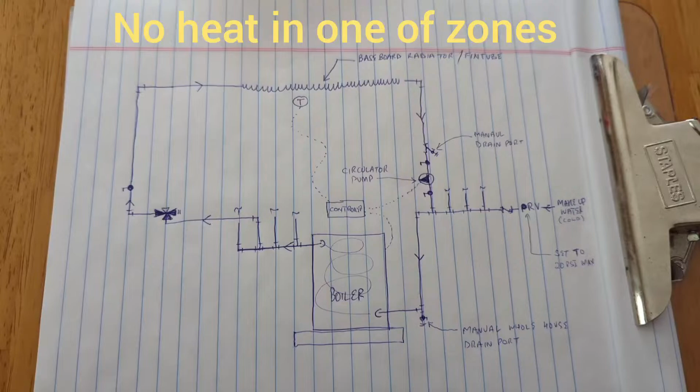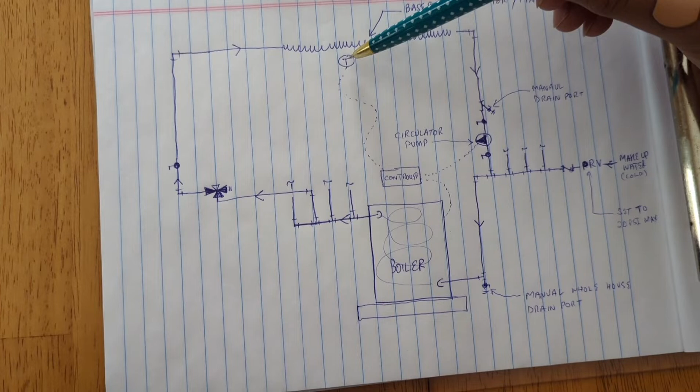So the thermostat in the space is calling for heat, but there is no heat. There's no water flow through the baseboard radiators in the space. And so even though this is calling for heat, set to 68, 70 degrees, actual temperature inside is 55 degrees.

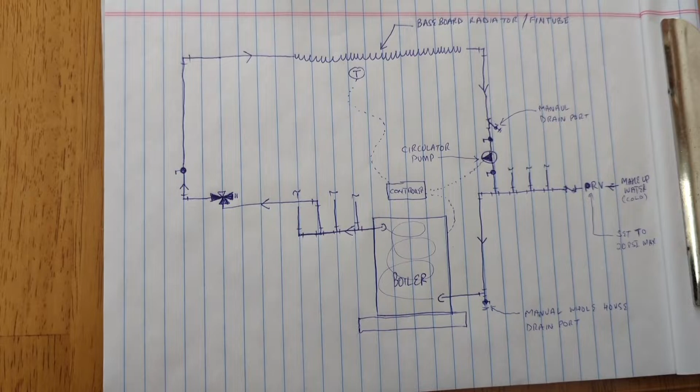And to go to the boiler room, first you look at the controller and see if the light is on for that specific zone to confirm if it is calling for heat, and it is calling for heat. So you know that there's no problem between the thermostat and the controller. Then you hear the humming of the pump, which indicates that the pump is running or trying to run.

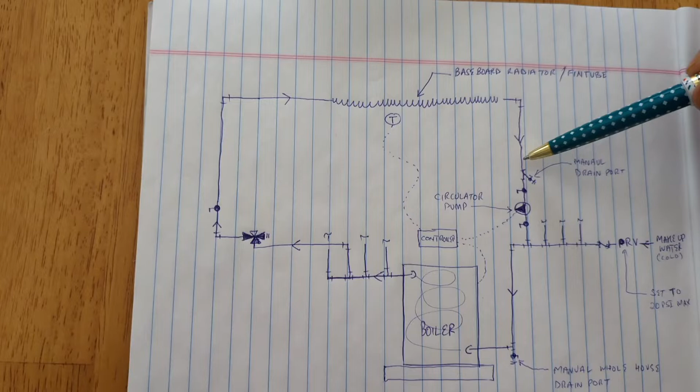And you look at the pump and you touch it, it's going to be very warm. When you touch this pipe, the pipe is not hot like the way it's supposed to be. Okay? That means there is no flow through here.

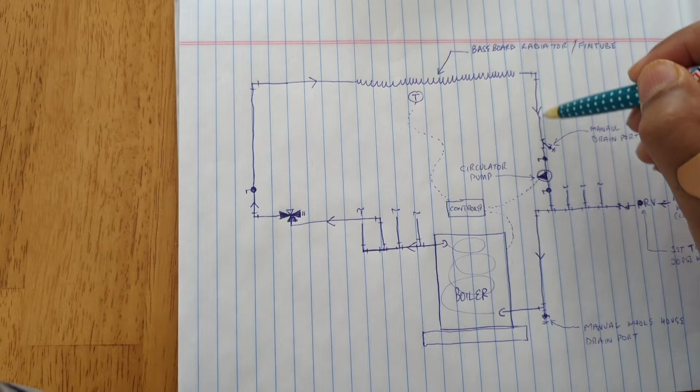The way it's supposed to work is this pump is supposed to pump. The thermostat tells the controller I need heat. Controller says pump come on. Pump starts to turn. The flow of the water is pumping through the boiler. So this is how water moves.

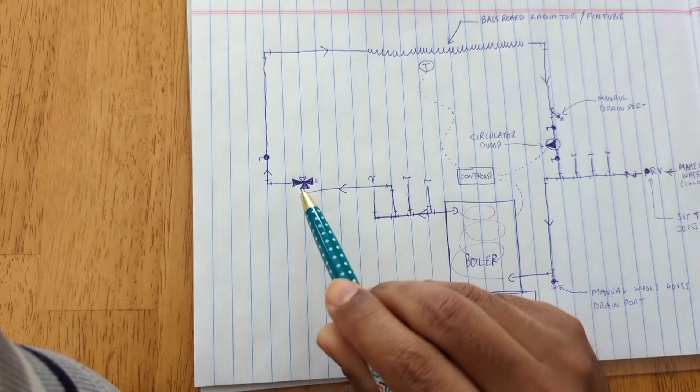So from the pump, water moves, comes here, goes here, comes here, goes inside the boiler, goes through the heat exchanger inside the boiler, comes back out, goes to the specific zone flow valve, which is essentially a backflow preventer for the hydronic systems, so that the water flow is only in this direction and never in the back direction.

And this is usually used when you have multiple zones. So the water is coming through, like I said, move through here, goes through here, goes all the way around.

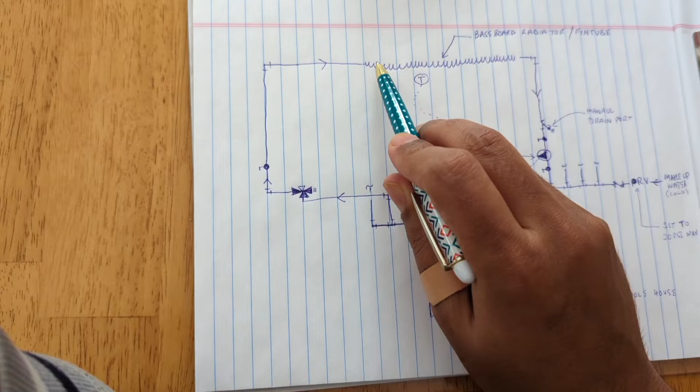Goes through the radiators. So entering it, water is 180 degrees. By the time it leaves, it's probably at 140, and it's coming back down. And then as long as this pump is moving, the water is doing the circulation through that particular loop. There are other zones that we're not going to discuss, but they do the same, and they do it independently.

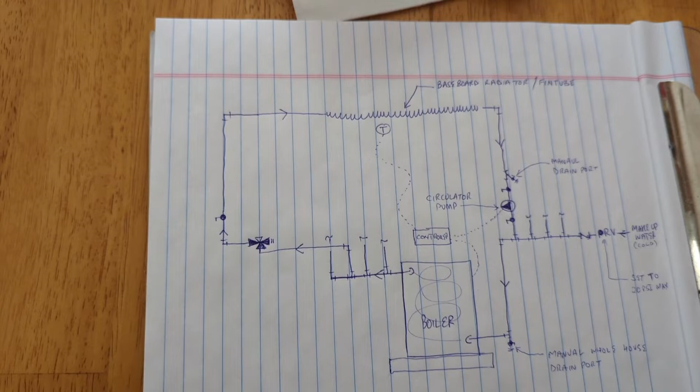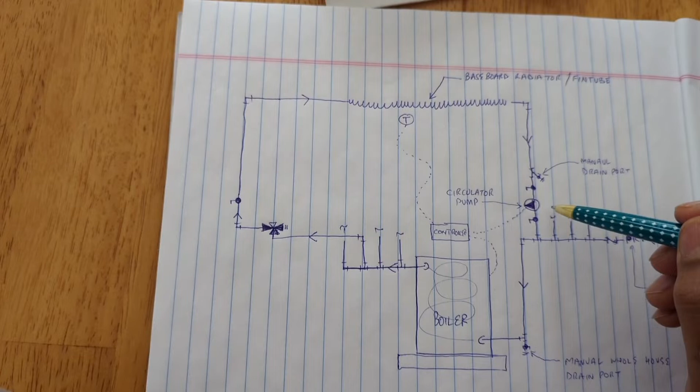So test number one is to see if this motor works. So one of the ways to do that is to turn off the system, remove the motor from the housing, and see if the impeller moves freely. And also you can do the test, not recommended, but that's what I did, is turn the thermostat back on and see if the motor spins, and it spun just fine. So that was the test.

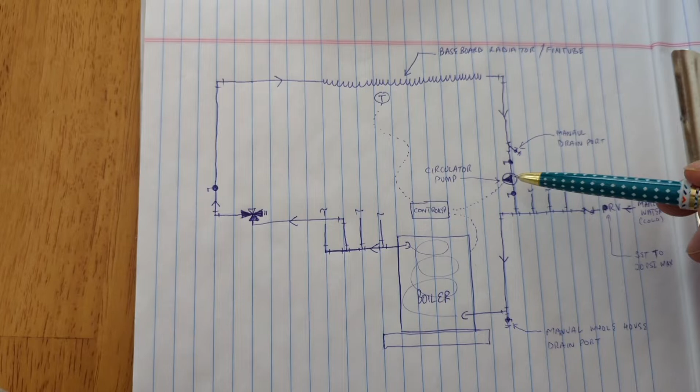Is this circulator bad? No, it was not bad. One thing that I would say is it's possible that this pump may be not as strong as it used to be, but I have a suspicion that that's not really the case. Banking on that based on what my diagnostic was.

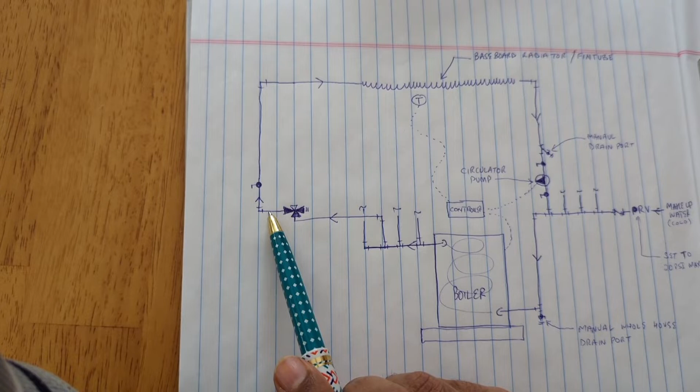So this pump is working. It is doing what it's supposed to do, but why is water not moving through? Because every other zone, if you touch these pipes beyond this backflow valve, it's called flocheck, Flocheck, made by Taco, flocheck valve. This side should be very hot, but in our case, not really. It's not hot compared to the other zones.

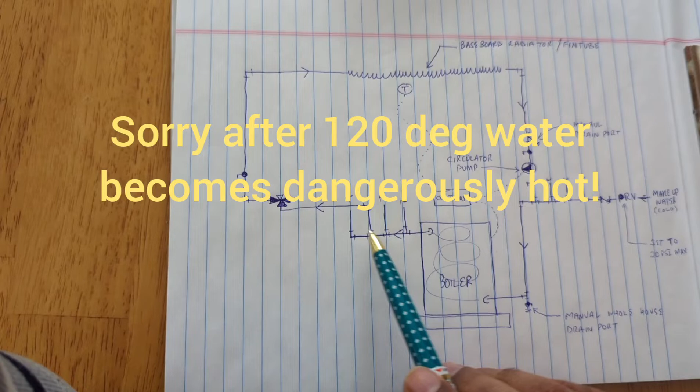Because the water is moving, it's not touchable. Because 180 degrees is really hot. 120 is your limit. After that, you can burn your hands. So the copper pipes and metal pipes are really, really hot. And others, whereas this one is warm to touch, and I can grab onto it for as long as I want. So water's not moving through.

So there's three options. Could the system have a block or jam somewhere in there, pipe freezing? My system has glycol in it. Temperature in the house has not dropped below freezing, so that's not a concern.

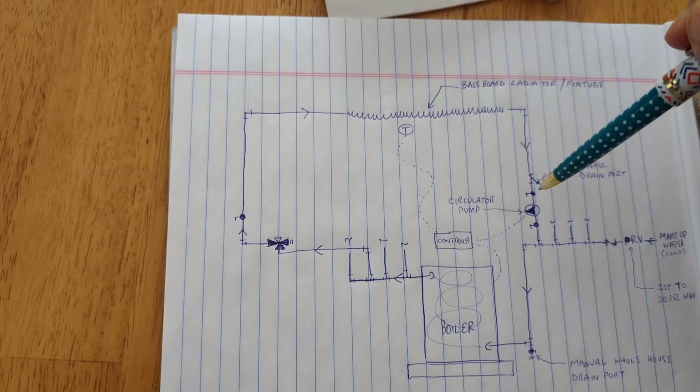It has glycol in it, quite a bit of concentration, probably 40 or 50% of the water is glycol. Propylene glycol or ethylene glycol, either way, there's no way that pipes are frozen.

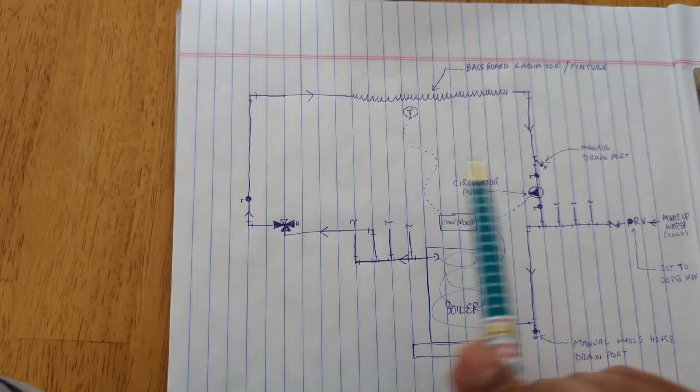So if the pump's working, then there's something wrong with this valve. Obviously you want to check any shutoff valves that are not closed. This, because it's happened as it was operating and it's all of a sudden stopped operating, the valves are open. So what are we going to do to test this valve?

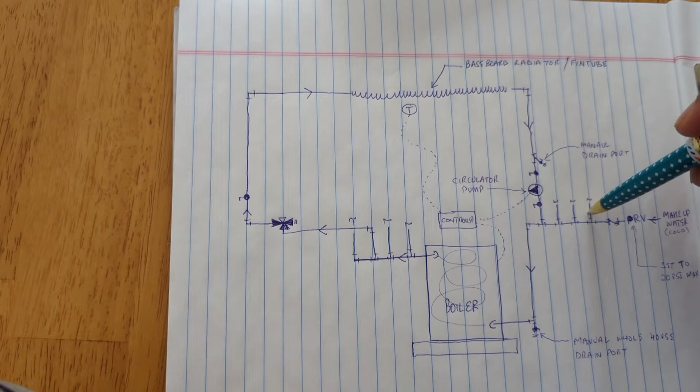What we're going to do is we're going to turn off all the other zones so they're not operating. We're going to make sure that the domestic water is not working. Zone number 1 and 2 are not working, and we're going to go to, or 1, 2, 3. Zone number 4 is also, so the only zone that we're going to try, we're going to even turn this one off. We're going to turn this zone off.

We're going to shut this valve off. We're going to shut this valve off so that there's no air traveling back this way. We're going to keep this line open. All the other lines we're going to shut off. Close the valves, okay?

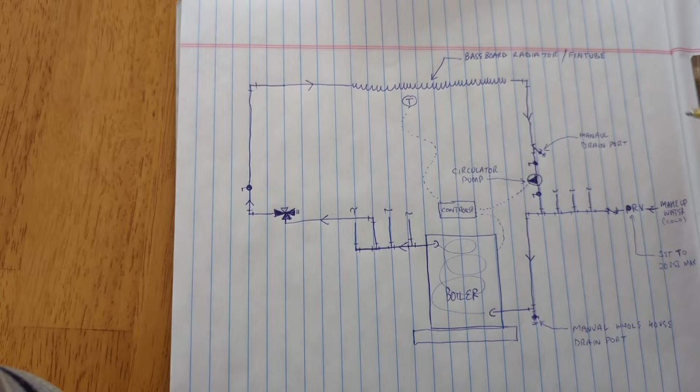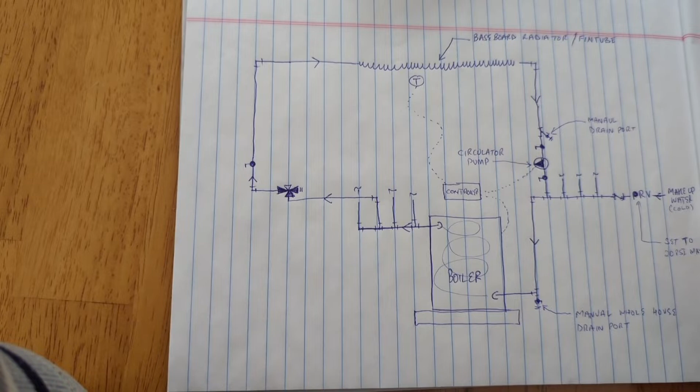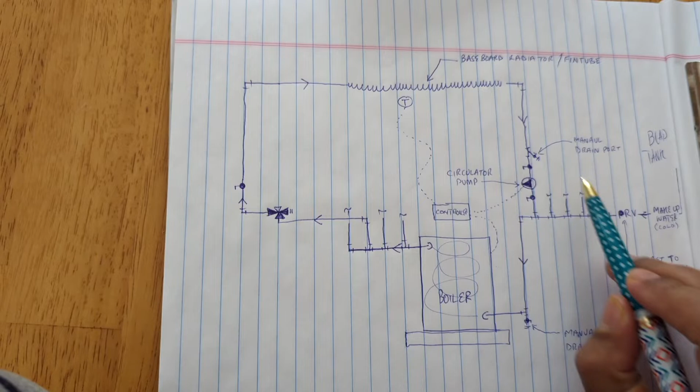So what we're going to do is drain the water from here. As we drain it, all the water in here is going to start to drain. If this valve is good, this PRV makeup water valve is going to see that the pressure is dropping, and the bladder tank sitting back here, which gives you up to 20 psi of water pressure, is going to start to fill this back up. If this valve is working, the water will never end - you'll see it continue to move as it keeps filling the system back up.

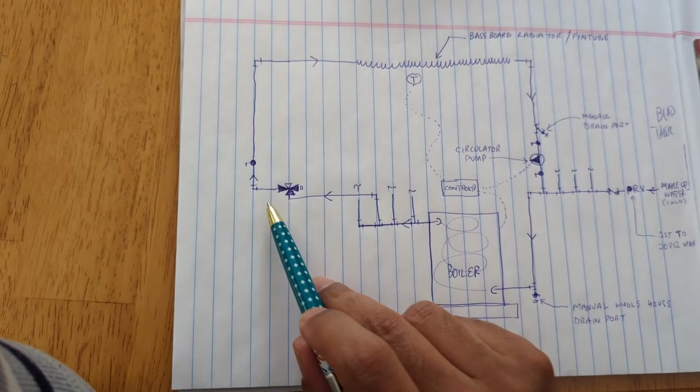However, if this valve is open and we're draining, and all of a sudden the water stops running, that's an indication that this valve is no longer working, and that's what needs to be replaced, not the motor. Sometimes you have both things bad, I get that, but we've already tested the motor and it's fine. So this test is to check if this valve is bad, and that's the way to do it. Let's get to it.

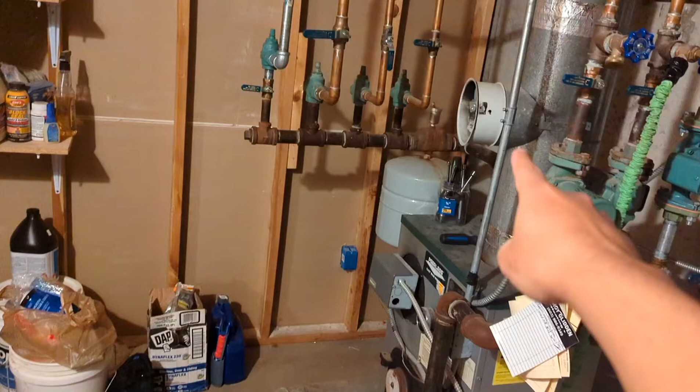Alright, so as you can see, this is the system. The one zone that is not working is this particular one. This is where the water is coming back from, that's where the circulator is. It's supposed to turn on, run right into the piping down there, goes into the boiler, through the boiler, comes back out, comes in through there, and that's the zone that's supposed to take up to the baseboard radiators.

This is what's in question, this flow check valve, and what's in question is this motor. So we've taken the motor apart - just that housing section, these 4 bolts down here, remove that, take the motor out, try to spin it and see if it's locked. Sometimes it's airlocked, but anyway, the motor is fine, it turns on just fine, moves freely in there, so it should not be the problem.

So we're draining this zone now, and we're hoping that this backflow makeup water is going to make up for the water, and I'm hearing the water flowing through it. So what it's telling me is that valve is okay - it's not bad because the water has not cut off yet, and I'm draining it, and this is moving, you can hear it. I don't know if you can hear it on the phone, but it's moving. So now I think it is the motor.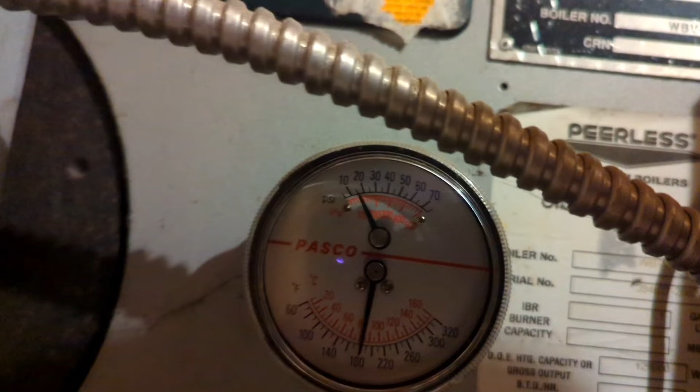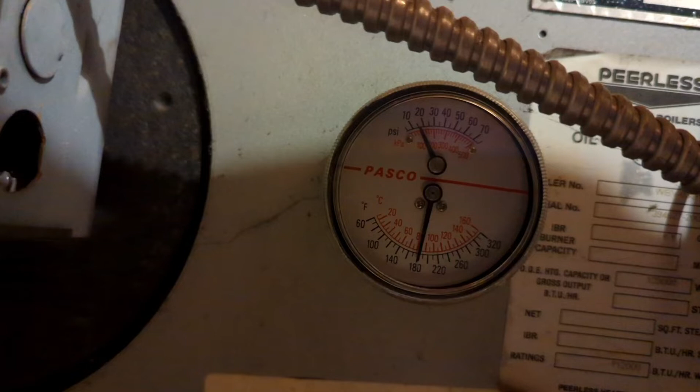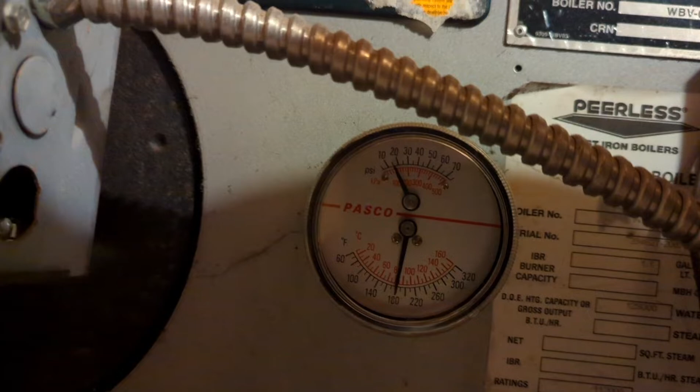Either it's airlocked or we need to replace that motor, but it sounds to me that that would be the issue. If this water had stopped flowing, and then the pressure gauge in here - right now it's at 15 psi, you can see that by looking at the gauge, that's 10, that's 20 - if the water was not getting filled up, that would have gone down to 0, or eventually gotten down there, but it hasn't dropped below 15. So it goes to show the water is being filled up, and it's been a couple minutes, so there's no problem with that valve.

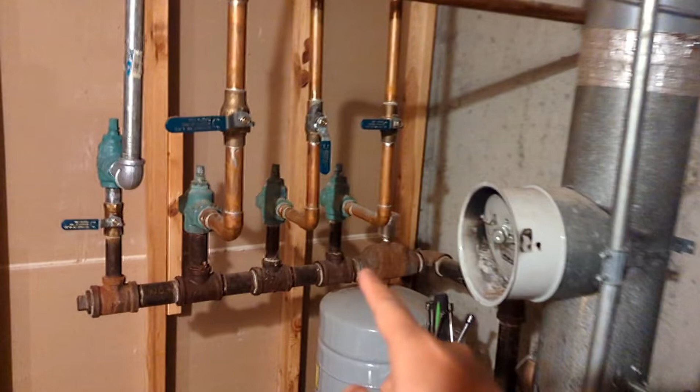I'm glad that I didn't touch that. I was almost gonna cut that open and try to replace it and add a whole lot of work for myself. You can see, because it's attached to copper, there's no easy way to remove that valve. I would have to cut it here and then remove that whole thing, and I'm glad I didn't do that.

So I think we're just gonna have to replace the motor. If I can find it, it's probably 120, 130 bucks. And just do some rewiring again, and off we go. This is one of the new circulators - so this is an old one, the new one will look like that, and it'll fit right in that location.

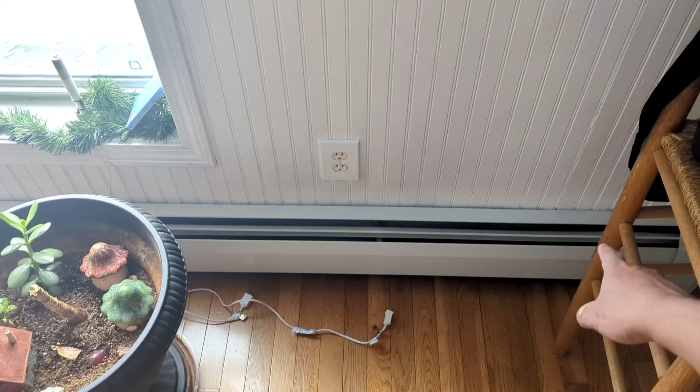Alright, so what happened was, as I was draining the water, these baseboard radiators - because there was hot water stored inside the boiler at 180 degrees - with me draining the system, the backfill started filling the boiler, and the water from the boiler got pushed out. It's now confirmed that the flow check valve is working, because with the pump off and just water pressure through the bladder tank, it allowed water to move through here, and these came on, and the pipes downstairs even got really hot. So that means the valve is not bad.

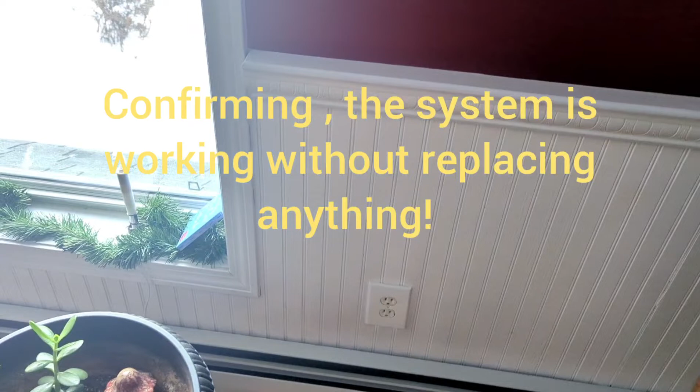Confirmed. Now I've turned on the thermostat, pump's on, it's humming. We'll wait a little bit until we really finalize if it's actually still putting out the heat. Right now I feel it, but it could be the water that had already come in here just radiating. But we may have fixed the problem, because it may have just been airlocked.